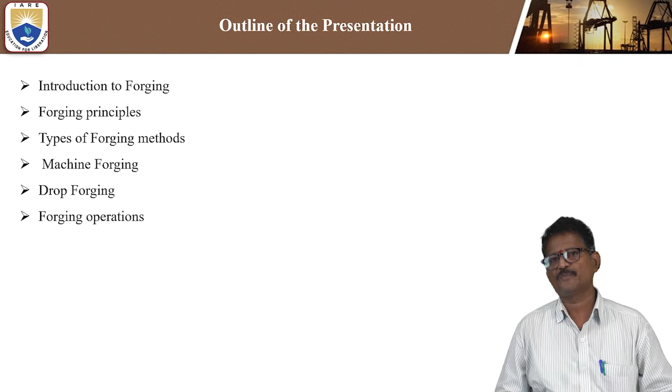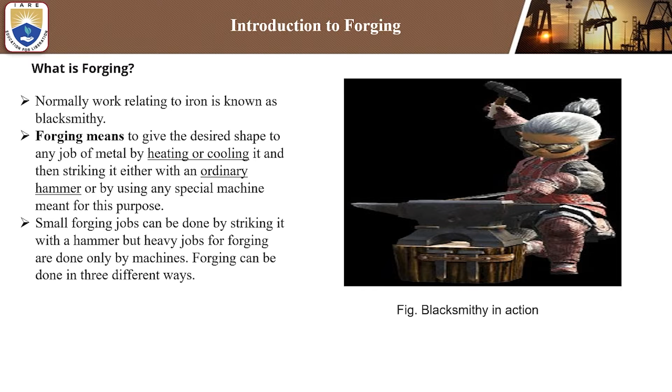Now let us see what is forging. In general, the term forging can be defined as work related to iron, which is known as blacksmithy. When you speak about this forging process, you should keep in mind that in all the villages they perform some blacksmithy.

Blacksmithy is where heating is done with the blower, and after the material is red hot, it is taken to the anvil, and with the help of a hammer we can perform simple shapes like L, S, and hook shapes.

In general, forging means giving the desired shape to any metal job by heating or cooling it, and then striking it either with an ordinary hammer or using a special machine meant for this purpose, such as a hydraulic or pneumatic type of press, to maintain uniform pressure and temperature.

Small forging jobs can be done by striking with a hammer, but heavy jobs require transforming shape and size only through machines, that is, high tonnage capacity pressing machines, in order to change its shape.

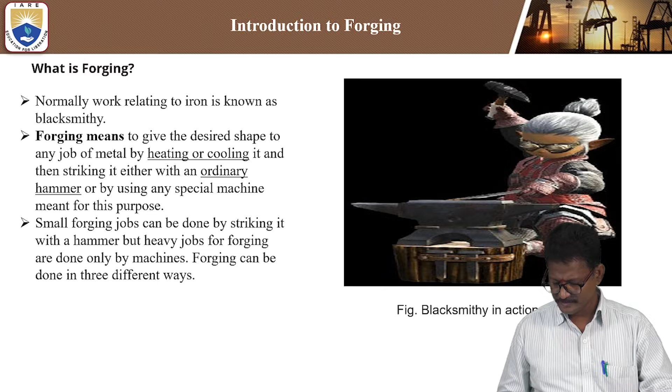Initially you heat the metal in a furnace or smithy shop, and after getting it red hot, you take it with the help of tongs and keep it on the anvil, and with the help of press hammers you can perform shaping easily. Now let us look at the important forging operations where you can change its shape and size.

So look at how we can perform this, this is the drawing operation, this is the punching operation. Drawing means enlarging its length while reducing the diameter. Punching means making a hollow part, a punched out part which is called blanking, and making the hollow portion is called piercing. This I have studied in earlier classes.

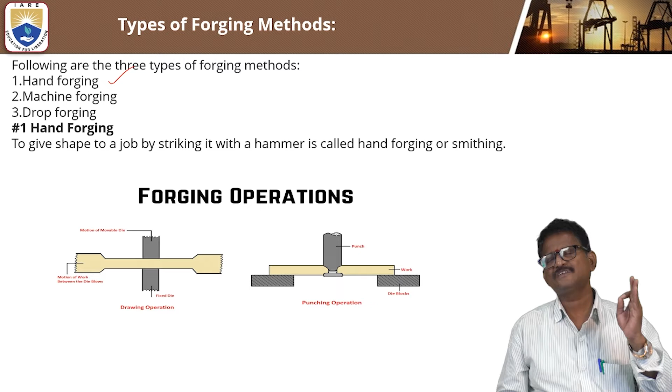But now I have focused on only what about hand forging, machine forging and drop forging, and what are the different types of forging operations and their principles. We'll discuss in detail. Let us see another interesting type of forging technique, which is machine forging.

Instead of manually performing large forces and pressures, we can go for machines. Machines in the sense of 1 ton, 2 ton, or 10 ton presses can be used to give the desired shape to the job with the help of a forging machine, called machine forging. So to give a desired shape to a job, whether it's circular, rectangular, or hexagonal, any polygonal shape can also be performed with the help of the forging machine, which is called machine forging.

So obviously these forging machines are also used as press machines or rolling machines, depending upon the application. You can select a variety of machines, and all various kinds of power hammers are also included in this category.

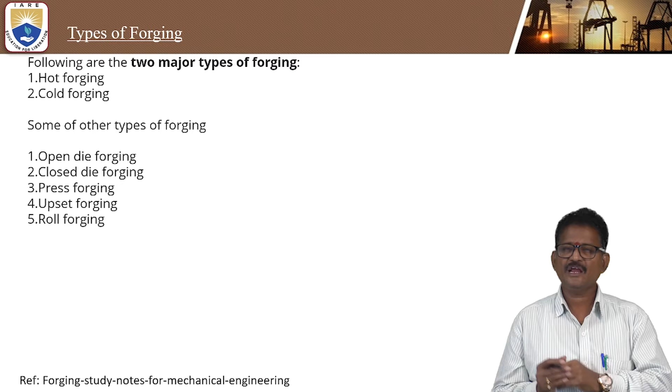And some other types of forging methods are available, that is open die forging. Generally there will be an open die, one top die and bottom die, and you can keep the workpiece. If you apply some punch, this is open. So exact dimensional accuracy cannot be maintained in open die forging.

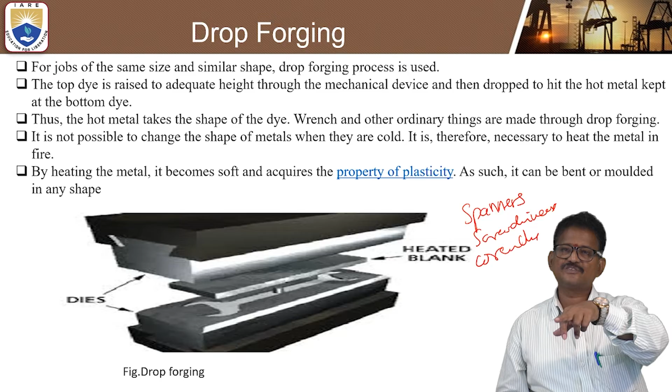When you're speaking about closed die forging, it's like this closed die. You can see this is open; closed means the mold can be completely closed. Only you can apply the force pressure through the punch. That's called closed die forging. And press forging, wherever machines are used to make a simple shape, that's called press forging.

And upset forging and roll forging are also two other important types of forging, where you are able to do some upsetting. Upsetting means changing its cross section. If it is circular, enlarge the circular section; with reduction in length, diameter can be increased. And roll forging is where circular and symmetrical semicircular components are made.

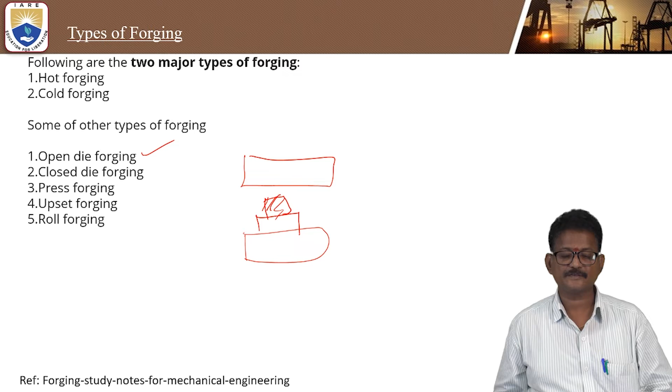Now let us see the different types of operations important in any forging technique. These 11 operations are very important to perform any simple forging operation, whether it is hand forging, machine forging, press forging or drop forging. These are a sequence of operations you can perform to get the required shape and size of the component.

Especially in forging, the majority think only hot forging can be performed. Why? Because ferrous and non-ferrous metals can be heated above their recrystallization temperature, so that due to plasticity, plastic deformation takes place, and by applying a little pressure you can convert the shape and size of the material as per the customer requirement.

Let us see the sequence of operations, the different types of operations required in forging. The first one is cutting operation, upsetting operation, drawing out operation, jumping operation, bending operation, fullering operation, edging operation, punching or drifting operation, especially in village agricultural drifting, where you pour the water in a drift tool and so on. And setting down operation and forge welding operation. Finally, swaging operation. All these operations are most widely used in any type of forging technique.

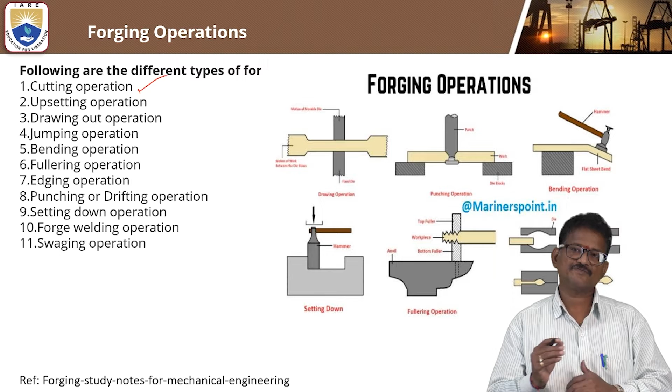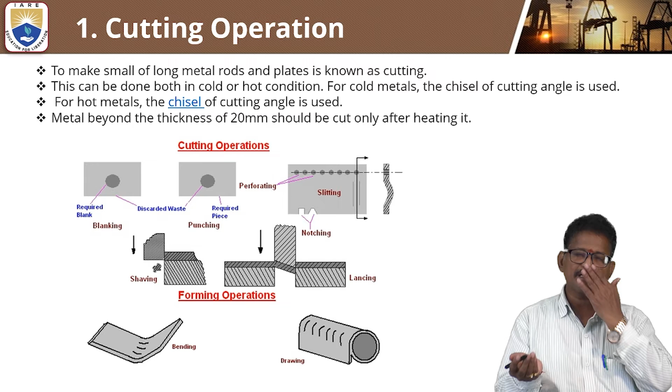Let us see the first cutting operation. When you are speaking about the cutting operation, any continuous metal can be separated from the piece. So to make small pieces of long metal rods or long metal plates is known as cutting. Whenever there is a lengthy piece and you want two pieces, you have to cut. That cut piece will be used in different types of cutting operations or forming operations, etc. So to make small pieces of long metal rods or plates is known as cutting.

This can be done in both cold or hot condition. When it is hot, automatically less pressure is required. When it is cold, large pressures are required. High tonnage presses are required to change its shape and size.

Obviously, when it is cold metal, a chisel with a cutting angle is used to perform the operation. And for hot metals, a chisel with a cutting angle is also used. The only difference is, when it is hot metal, structural changes have already occurred inside, so you can perform a simple operation and change its shape.

Metal beyond a thickness of 20 mm should be cut only after heating it. Below 20 mm thickness, it can be cut easily without heating, with shearing machines or punching and notching operations.

Look at some different types of cutting operations like blanking, where the inside part is punched out, and punching, meaning piercing, making hollow portions. A circular part can be removed from a square or rectangular piece. Notching means at the end some square, V type and L shape type of material can be removed. And slitting means cutting with the help of a cutter, scissors, etc. So these are some cutting operations.

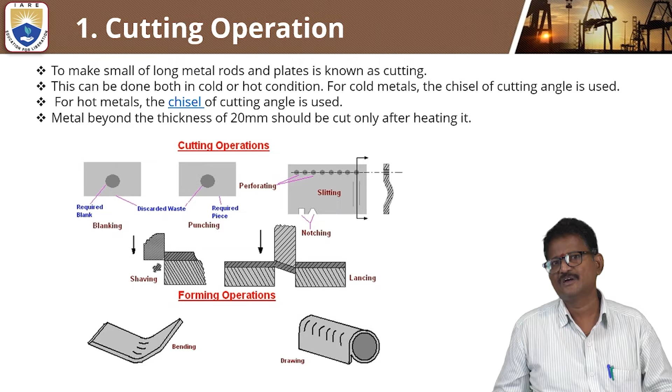This operation is applied to increase the cross-sectional area of the stock. The upsetting force is applied in a direction parallel to the long axis, for example in development of the bolt head. The bolt head has stipulated standard dimensions. It cannot exceed them, it cannot be reduced. Only then can it fit together in any type of application.

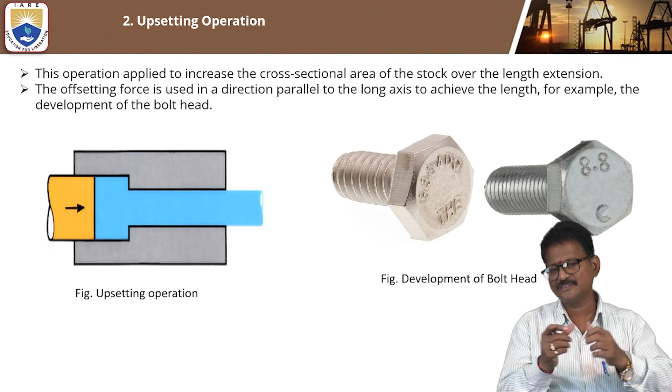Upsetting means we apply force, and the diameter is enlarged. Another important operation is the drawing out operation. In a simple drawing out operation, there is a workpiece and a fixed die top and bottom, and the work moves between the die blows. There the diameter can be reduced and the length increased.

So to increase the metal length is called drawing out. Simply, when you want to increase the length of the metal, it is named the drawing out process. This has been shown clearly in this figure. Even a layman can understand it effectively.

The metal is heated and the hammer is struck at the beak of the anvil. Here a fuller is used to reduce the diameter and increase the length. There is a bottom fuller and a top fuller. The fuller can also be in different shapes.

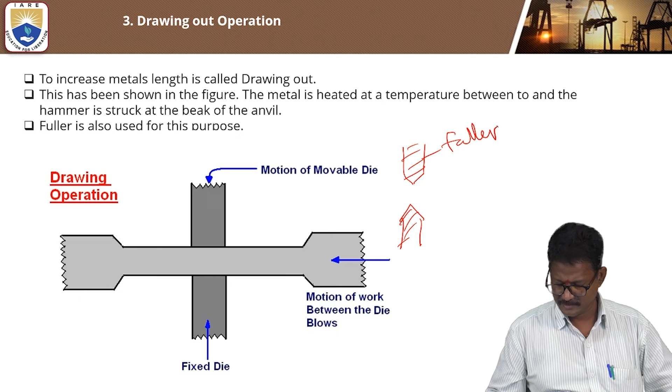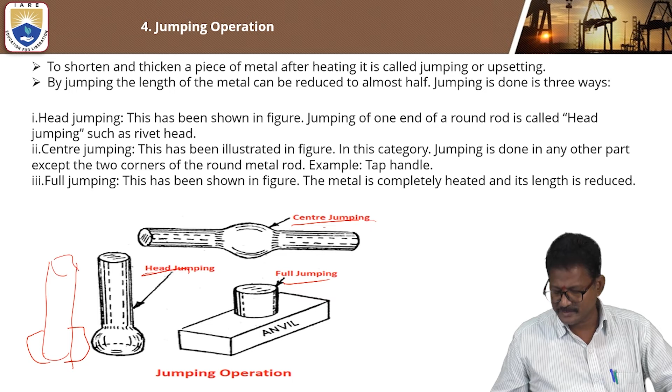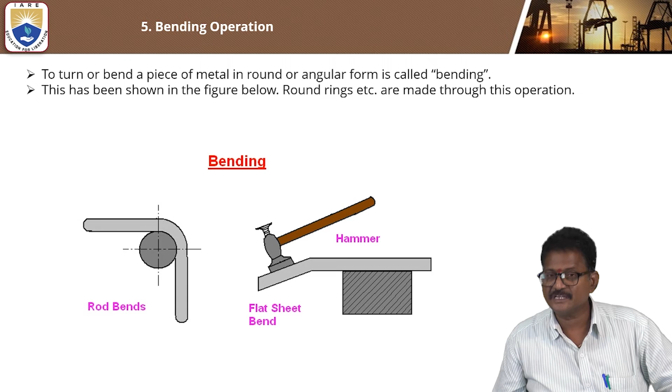And coming to fullering, it is very interesting in forging operations. Even when we discuss open die or closed die, any type of process, this fullering operation plays a vital role. Okay, so look clearly. The center one is the workpiece, and there will be a bottom fuller and a top fuller. There is the anvil, the bottom fuller, the workpiece and the top fuller, and whenever the force is applied through the top fuller with the help of the sledgehammer, by doing this fullering operation the length can be increased and the diameter obviously reduced. This is about the fullering operation.

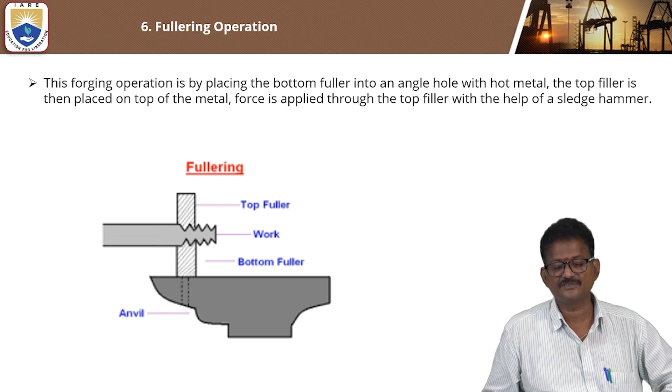Edging. The best example for edging is spanners, 5 mm, 6 mm, 10 mm, 12 mm. Different types of shapes can be performed. This forging operation is performed by striking or forcing the metal plate to a desired shape. The workpiece is forced between two die edges. Not like this, okay, two die edges, so that you can apply force and pressure and it cannot deviate.

Okay, so these are some important edging techniques for a better understanding of edging, especially adjustable wrenches. Wrenches are difficult to make manually. That is why wrenches and other complicated shapes can follow this edging operation and other related techniques.

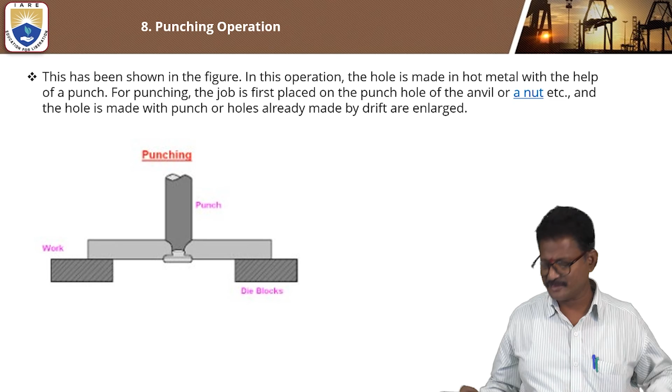punch. For punching, a job is first placed on the punch hole of the anvil or a nut, and the hole is made with the punch, or holes already made are enlarged with the drift. Okay, so this is what about the punching operation.

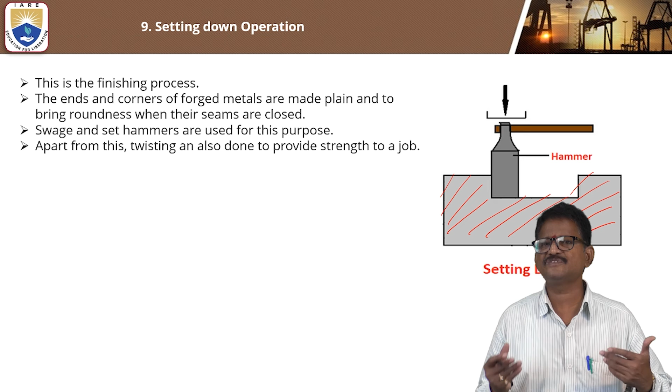Okay, so setting down simply means it is a finishing operation or finishing process. The ends and corners of the forged metals are made plain to bring roundness, in which their seams are closed. Okay, swages and set hammers are used for this purpose only. And apart from this, twisting is also done in providing strength to a job.

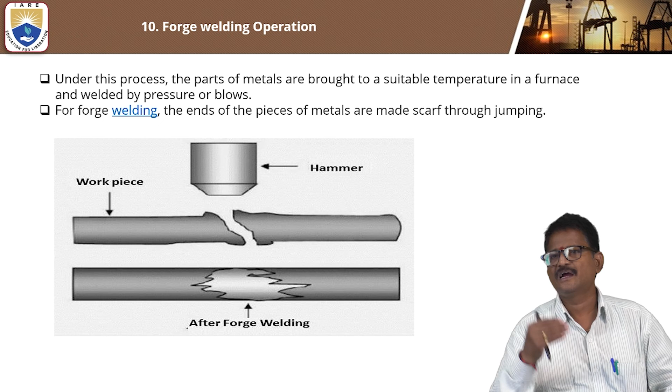So this forge welding operation, it is a process where the parts of the metal are brought to a suitable temperature in a furnace. Okay, and for forge welding, the ends of the pieces of the metals are made and scarfed through the jumping process.

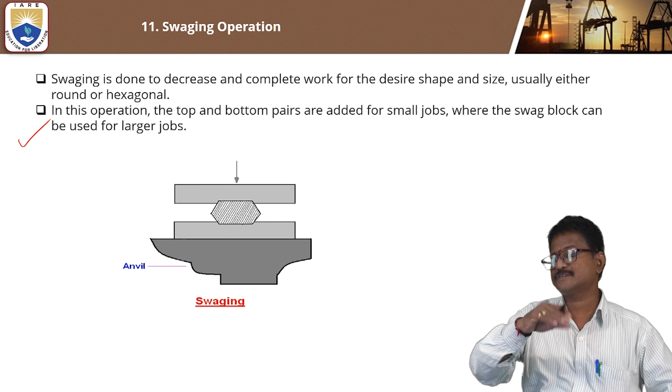Next, swaging operation. Swaging operation is simply done to decrease the work to the desired shape and size, usually either round or hexagonal, or even square can also be performed. So in this swaging operation, top and bottom pairs are used for small jobs, whereas the swage block can be used for large jobs. That is a separate automated field that will perform this swaging operation.

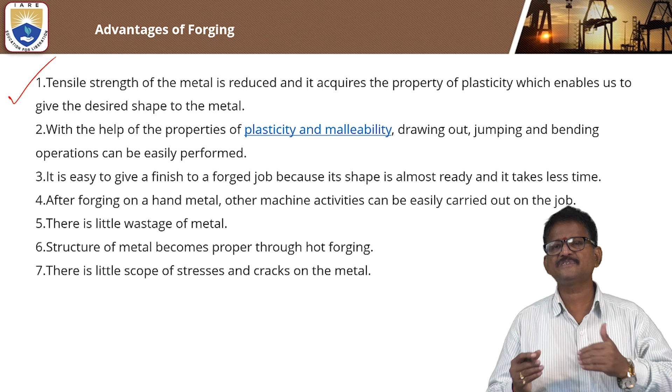And coming to the advantages and limitations of this forging. So the first and foremost thing is mechanical properties such as tensile strength of the material is reduced, and it acquires the property of plasticity. The property of plasticity enables us to give the desired shape to the metal. And the second advantage is with the help of the properties of plasticity and malleability, drawing out, jumping, and bending operations can also be performed effectively.

And the third important point is it is easy to give the finish because its shape is almost ready. It takes less time. Okay, it's a very interesting question. And after forging the metal, other machining activities are also easily carried out on the job. So there will be little wastage of the metal. Negligible wastage. Automatically it goes to the job, and there will be little wastage of the metal.

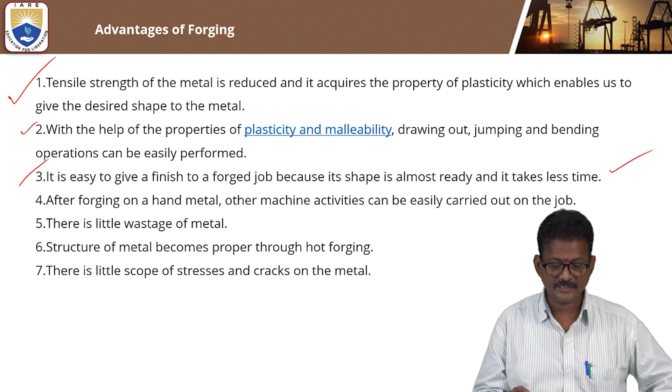Structure of the metal becomes proper through hot forging, and there is little scope for stresses and cracks in the metal. And for every process, there will be some drawbacks also. These are the few drawbacks which I have collected from the web resources. When the metal is heated, oxidation takes place, which harms the metal, and brittle metals cannot be forged in this process.

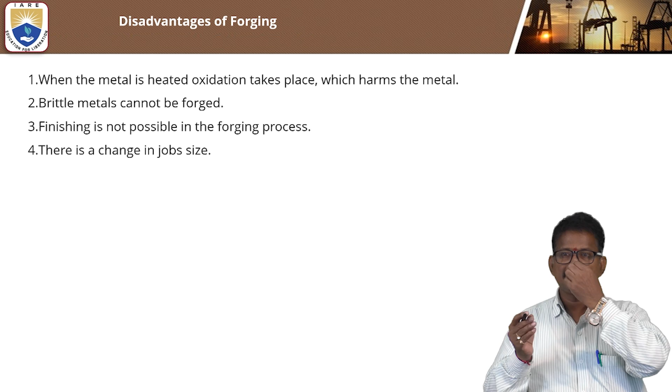And finally, fine finishing is not possible with the forging operation. There is a change in the job size, obviously. That is why all these parameters should be considered to perform a good forging process. Even for the disadvantages, where the oxidation takes place, you should clean it, and it can be effectively performed in this case.

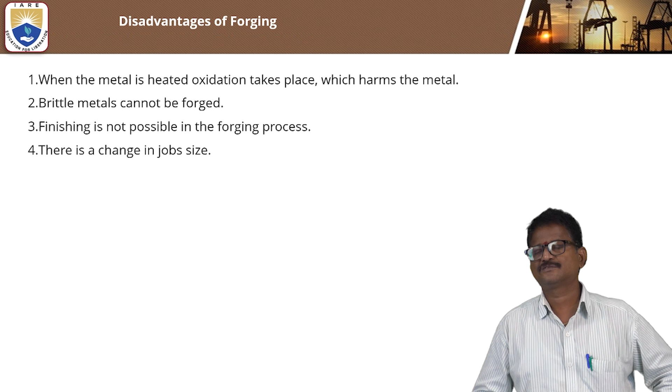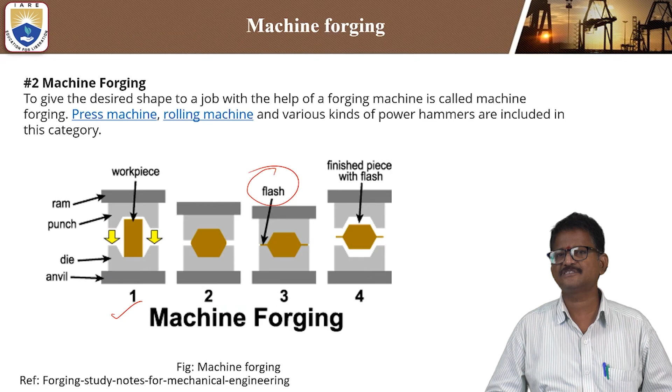Okay. So this is about the basic importance of the forging operations and its principles. I hope all the students understand clearly. And this is about the forging operations and principles. And in the next class, we'll discuss some other topic on the metal forging process.